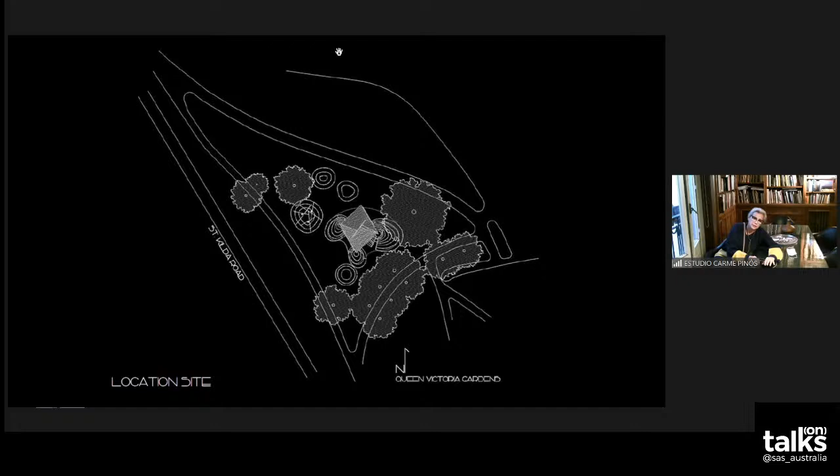This is the plan, where the hills also support the benches. And you see the legs here, where the legs at the third circle protect from the wind, and you can cross here and face the landscape that is completely in front.

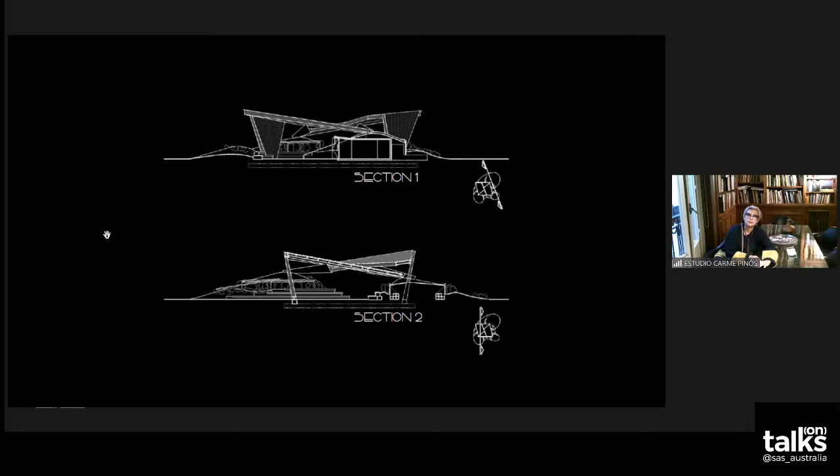One of the issues was that we had a problem storing all the materials, like things for the coffee and the seats, so one of the hills is empty to store construction materials.

Afterward I had a problem with the municipality, because I wanted these hills to permit people to sit, but the municipality, though I agreed with them, was afraid that it would permit people to go up on the roof, and they asked me to make a band.

I said okay, and I made the band. The band is la defensa, the defense, part of the drawing that is the garden in the hills, but it's saying it must be something that takes part in the project. It's not just, now I need to put a fence, okay. A fence must be completely attached as part of the project. And you see here, like the vegetation makes this circle, the fence also.

Everything is integrated. I feel more secure, because also each vision of the pavilion, each movement, the perspective and the perception change, which is also very sculptural.

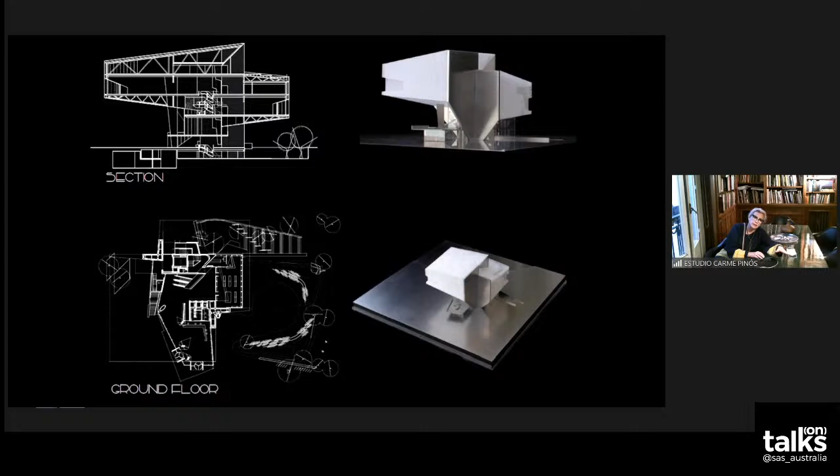The construction was very funny because they built first all the concrete, all the walls in concrete, and normally a building starts from the bottom to the top, and here it was the contrary. The people of the city didn't understand anything. They are making a factory - what is that?

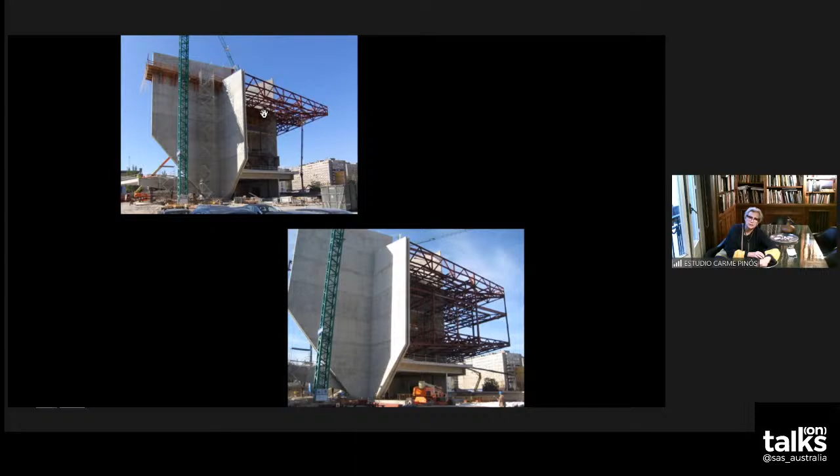Now they are very happy. It's like a machine, I said, and the geometry was very precise, and all the circulation of the installation had to be in this square in the middle.

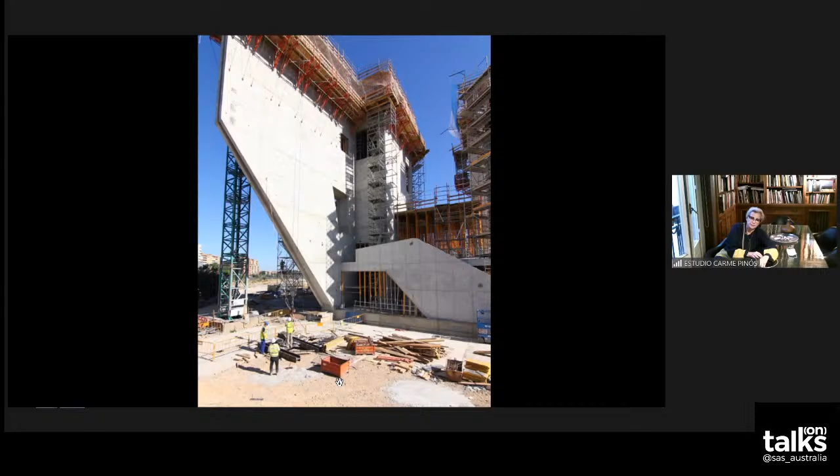But I didn't have space for the second stairs, nor for the installation. I say, okay, I had to resolve this, and the second stair I put outside. For the installation, I say, okay, I'm going to make this wall double, and all the installation passes in between these 2 walls, and at this point it's big enough that permits people to pass aside, and I resolve all the circulation at the wall, and this second stair I put outside.

But I didn't want to express that like a stair. How I resolved that - instead of making the stair to the bottom, to the ground floor, in a moment I cross the wall and I finish in the other part. Here and in the other wall and here. And I make the flanks of the stair very big to change the scale, not to appear like a stair, or to appear like an ornament.

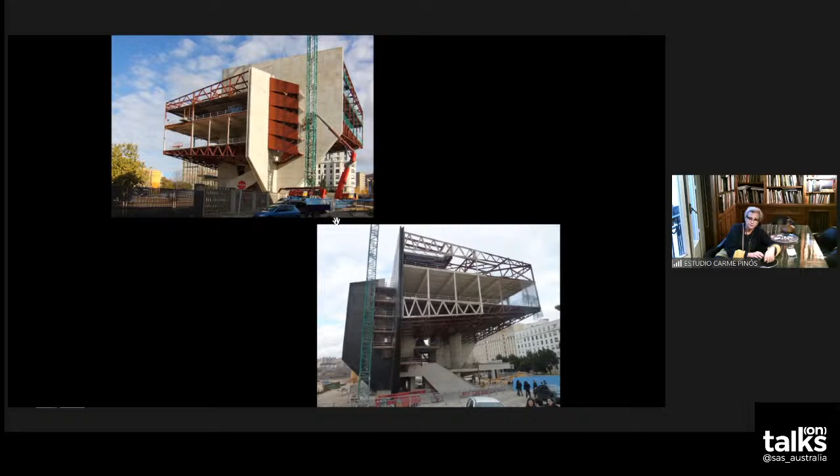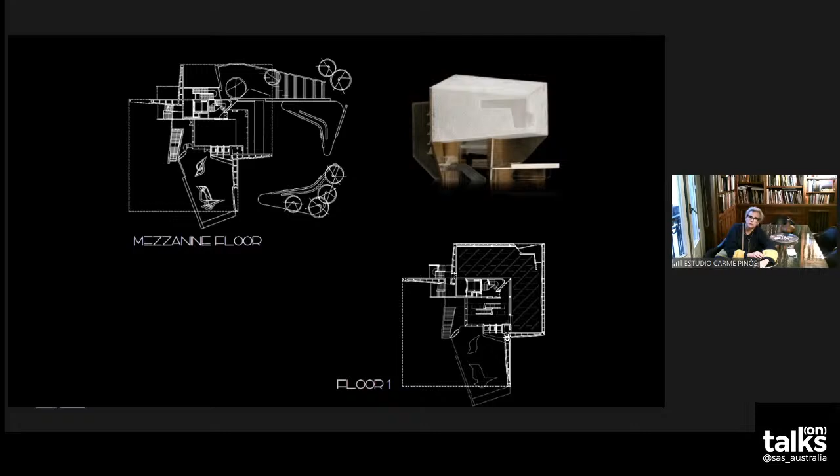You see, here must resolve everything. Here I resolve all the installation. Okay.

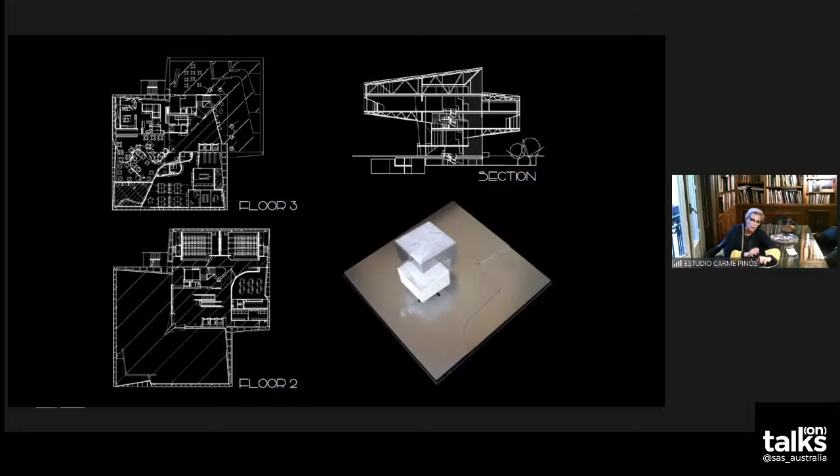And in the last floor, here they asked me so neutral, almost nothing. But when I was in the last floor, the restaurant, I start to make geometry much more free, exhibit the structure. I like to make my freedom, my happiness there, not so neutral like they asked for the rest.

This is the model that we made for the competition. You see this window in the corner. The beams are on top, but in the middle there are only some tirante, like cables, small pillars that are part of the supporting of the glass. You see, in the points that have more tension, there is no structure, they are floating.

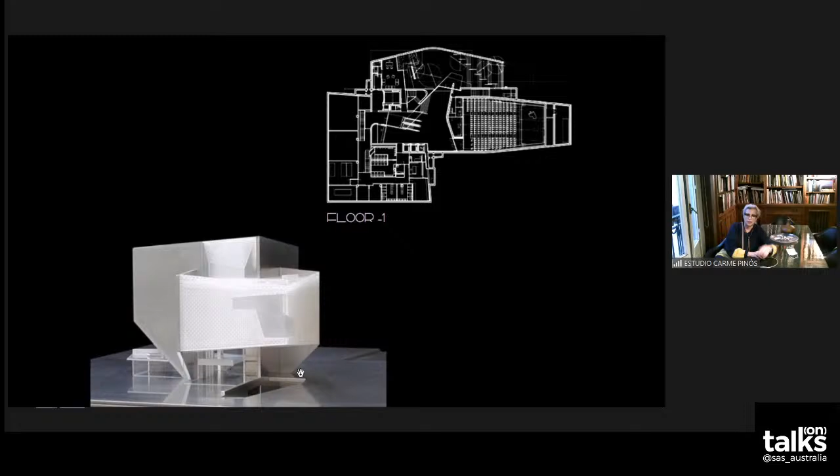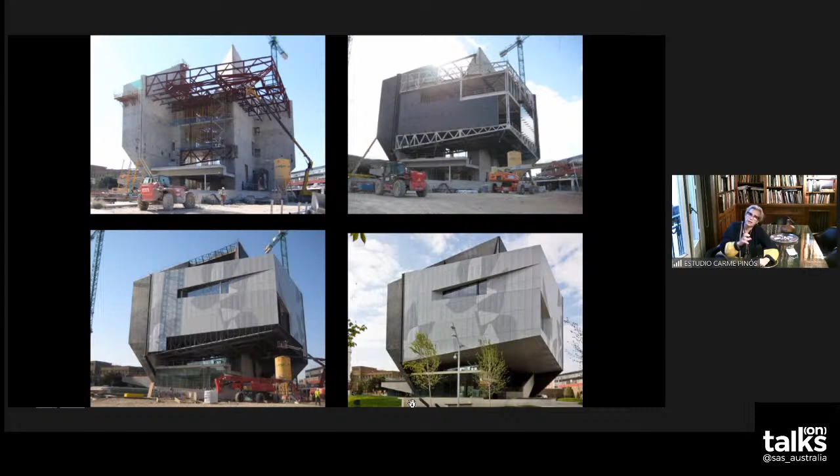And also to change the scale, we make these enormous drawings that are not pictures, only holes, so at night through these holes appears the light. But it's also to change the scale of the building, because it's a very big building, but we wanted it to appear less monumental. We make everything appear small. You see how behind we have the house, you realize the scale. And this window is not 6 meters, but 5 meters, I think.

This is my intention, that people from outside see things that happened inside. And the stairs are also to change the scale, because if you make a fence at the measure of a human, this becomes big, but changing the scale of the fence makes it appear small. Everything seems small in comparison to the building we have behind.

The structure: the two boxes, and the lobby is completely with no dependence, no relation, only this enormous beam. I show you, this is the part of the entrance with the lobby that works separately from the rest of the building, that goes to the street, that seems to ask people to enter, to come inside.

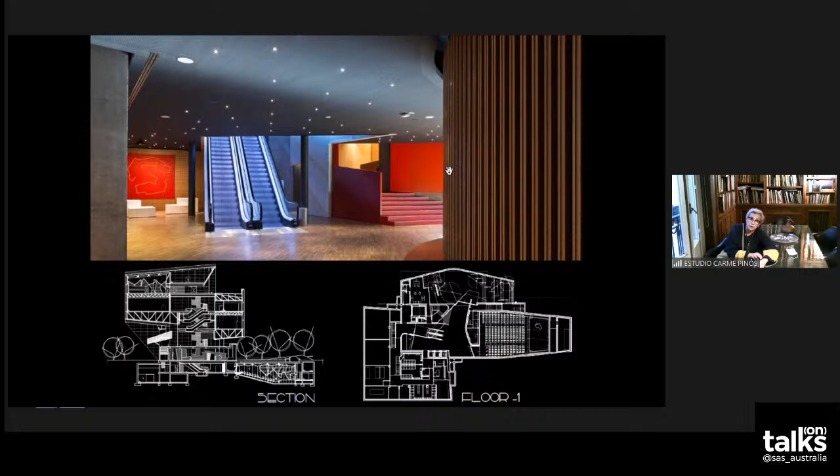Through the garden that I explained before, the light is coming. This is the amphitheater, and this is the garden I explained to you. In the concerts, you arrive from the lobby, but you go out through the garden.

And they make parties now and it works very well. At night, all these drawings are in light, and it's a building that, instead of being illuminated, illuminates and makes light for the city.

And the last one is, again, so important for me, is to understand the context - not only the physical context but also the cultural one. It's so important, the responsibility of being an architect is to understand the society. In a way, we construct the space where the relations, the sociability, can happen. And it's important, every time you go to a place, to understand where you are.

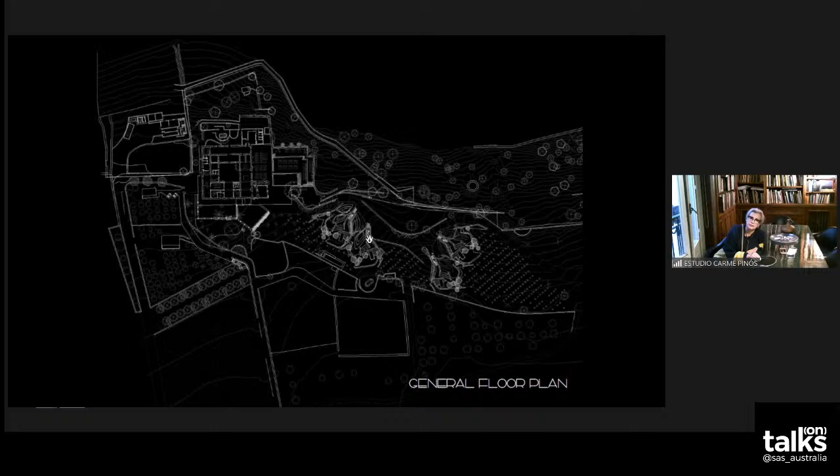From when you are in the swimming pool, where I made the expansion of the spa, of the terrace, you see the tops of the villas, like a landscape. This is the idea - these are the 4 villas, and the top of this villa is the landscape that you see from the hotel. You see the idea is to be completely part of the landscape, not in contrast. This is also the expansion.

I was very afraid, very worried about the materialization of the facade of the spa, because my client wanted it very transparent. They wanted to offer the people in the swimming pool, in the spa, the views - this is the massage room. They wanted to offer views, and they wanted glass. But no, this old monastery, the basement of the old monastery, it's not possible to be glass.

And I managed to make this with shadows, built pergolas - you will see later, this - and the reflection of the glasses is behind, you don't see it. Again, this idea, the top, the prolongation of the garden.